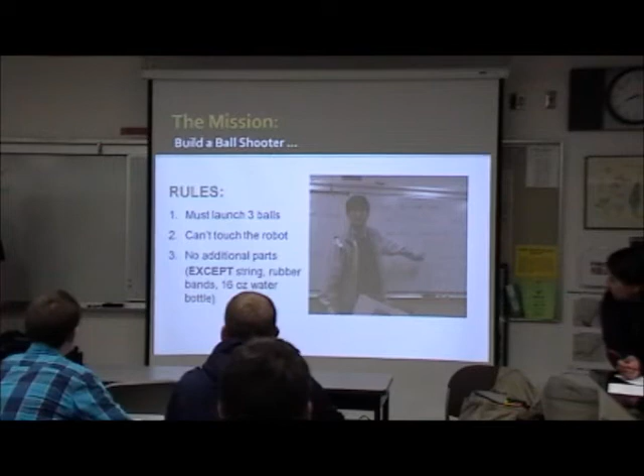The mission for this project was to create a ball shooter and a ball feeder. It had to launch 3 balls, and you could not touch the robot in between firing the balls, so it had to hold 3 balls at once. You can't use any additional parts, like something about the size of a bottle of water as a counterweight, and string and rubber bands.

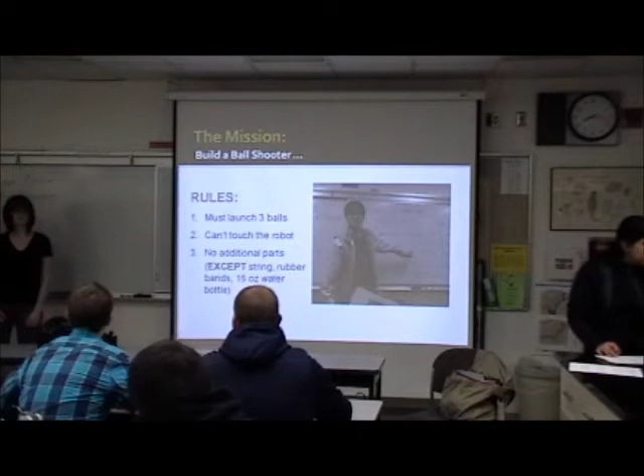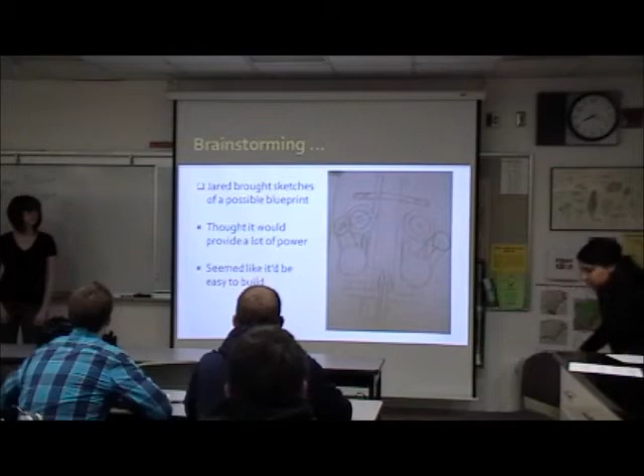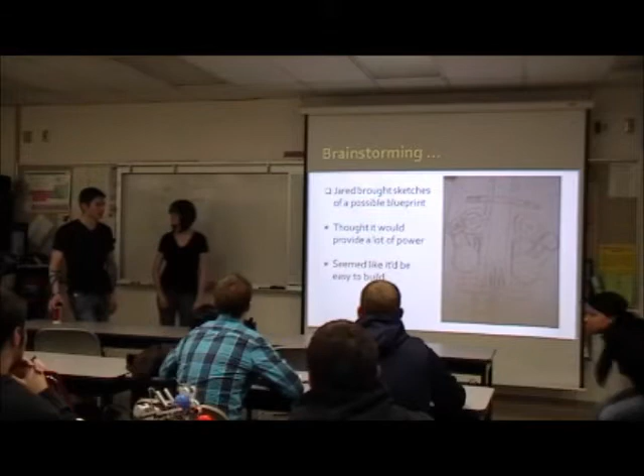Brainstorming before the project began, I had the idea about using motors hooked up to 2 wheels. We needed a high rate of speed to grab the ball and fling it out quite a ways. I saw a little bit online about it, so I drew up a plan before we began, hoping to get everyone on the same page and start building right away.

So this is pretty much the drawing. This is the first day we tried to just jerry rig something to see if the whole idea would work.

We tried to connect the 2 wheels with only 1 motor, so we had to connect it through the gears. The problem is if we put in an even number of gears, it will spin in the same direction, but we want it to be the opposite direction, so we need an odd number of gears.

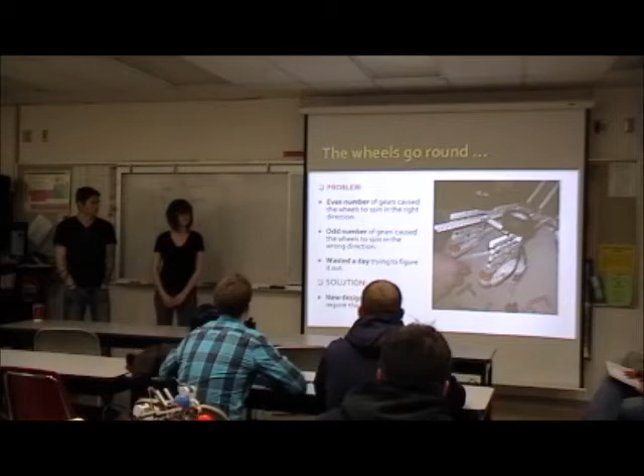But the next problem is the size of the gear — they don't match the distance between the 2 wheels, so we couldn't figure out how to fit an odd number of gears in the same distance. So finally we came up with a solution to make a new design.

One of the other problems we had with the wheel design — we tried for a day to make it work, but ended up giving it up because there were too many issues. The motors just wouldn't spin the wheels fast enough to fling the ball any reasonable distance, more than like 6 inches.

So here's an example of the gear reduction system we tried, and we ended up losing all the torque. Every gear change lost a lot of torque, so by the time we got the wheels spinning really fast and put the ball in, it just bound up, and we had no pressure to shoot the ball out at all. That was another big issue we had besides the spacing.

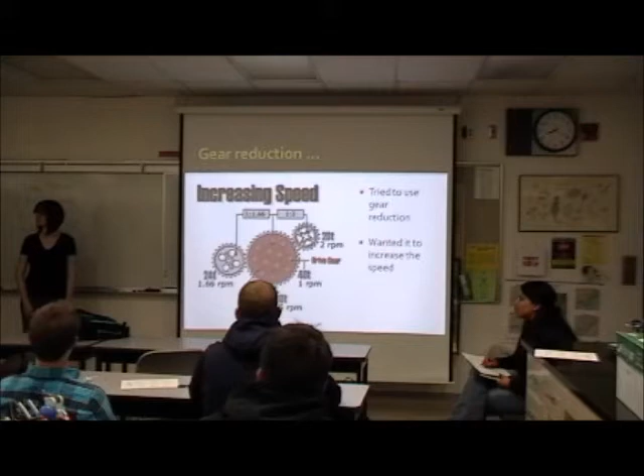I think those 2 big issues are pretty much the reasons we gave up the wheel design.

After we gave up the wheel design, instead of trying to be over creative, we decided we just needed to do something that works. So we decided to make a catapult, tried and true. We started with big pieces, building the frame for the catapult. This is that right here.

We decided to use a claw to fling it, and then attached a ball feeder later on after we got the mechanics of the actual catapult worked out.

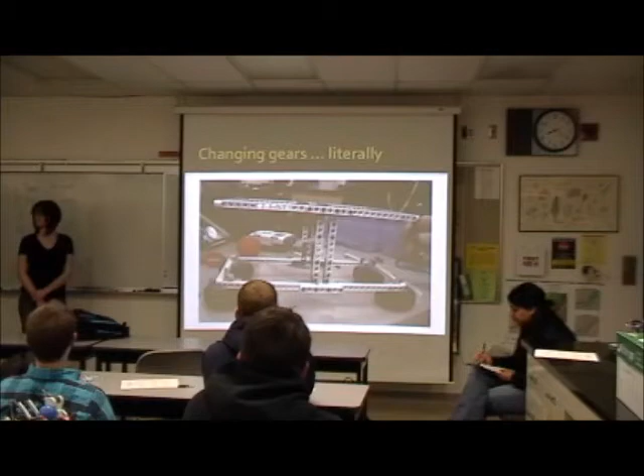When we were building the claw, we decided to use all 4 claws — 2 to hold the ball and the other 2 to brace it so it wouldn't fall out. But when we hooked up the ball feeder to it, it just ended up hitting the bracing claws and falling off, so we couldn't reload it.

Then we decided to use 2 straight beams as the support for the ball, and that worked. Then we found out it liked to just fall down the arm and get in the way of everything, so we added some more stuff, and that's pretty much it with the claw.

For the programming, we decided not to use any sensors to fire it — we just used a lot of timing. The problem was it would take too long, or one of the actions wouldn't complete in the program, so the arm wouldn't fire or the ball wouldn't load.

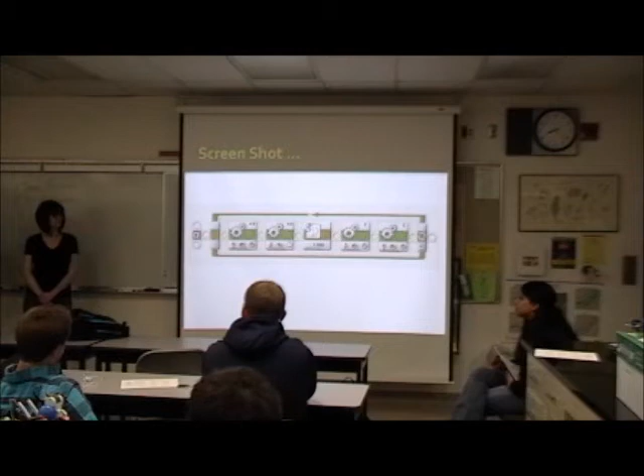This is the program right here. The first block is for the catapult to launch right away. The next block is for it to come back in for like 4 seconds. Then there's a 1 second delay, then the C motor, which is the ball feeder, goes forward then comes back, so it cradles the other ball.

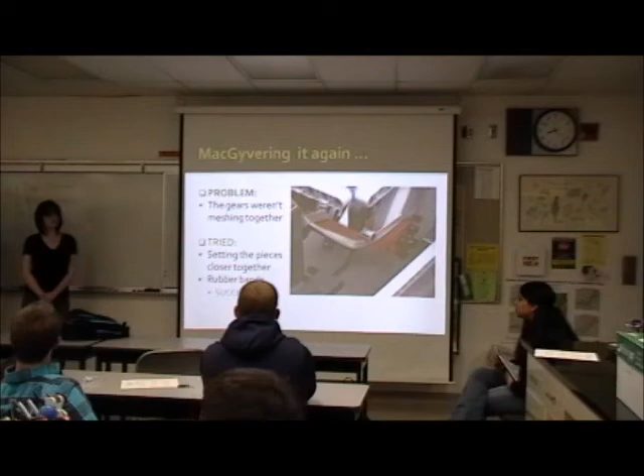Once again, we had problems with gears not quite meshing together, which is why we decided to rubber band the pieces so the gears would mesh together properly and make contact.

One of the problems we had after completing the robot for the most part was that we still needed to build something to put the balls on there, but we were really low on pieces. We were trying to make something that worked but still wanted it to look nice. In the end, the solution was just building something that worked with the pieces we had and not worrying so much about how it looked.

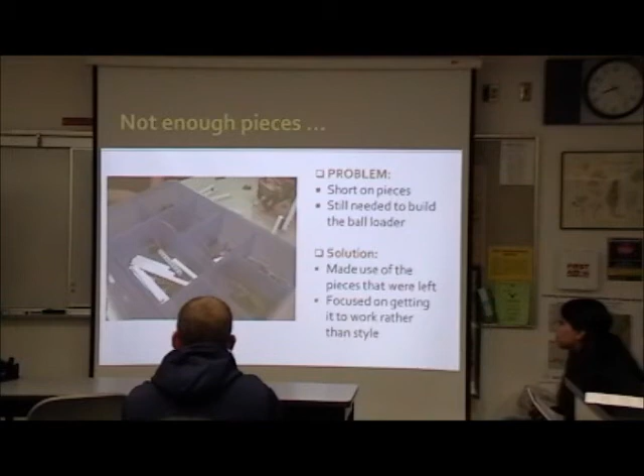After finishing the ball shooter, we started building the ball loader, designed as a high tower. On top of it there's a rail which the ball rolls on onto the claw, and a small pusher which pushes one ball and holds the other, keeping it on the rail. After the shooter fires one ball, it starts pushing another one.

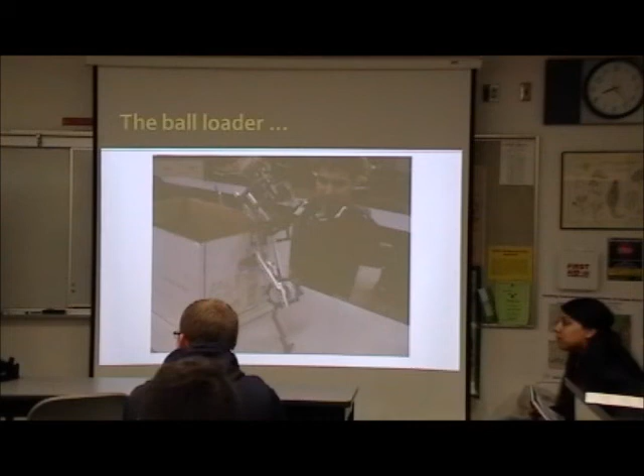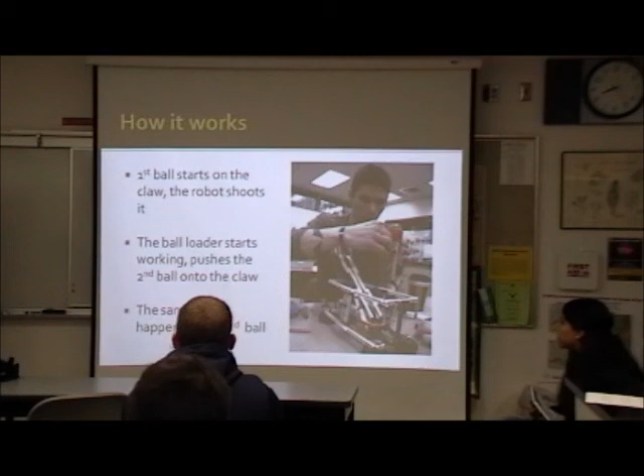So the whole robot works like this: we put the first ball on the claw and it shoots the first one, then it pushes another ball from the ball loader and shoots that one, and the same thing again.

Partway through, we realized we hadn't named our robot yet, and in honor of Jared's favorite argyle socks, we decided to name it the Argyle Bot. At first we considered naming it something like the Ghetto Bot or the MacGyver 2 because of the rubber bands again, but we decided to go with Argyle.